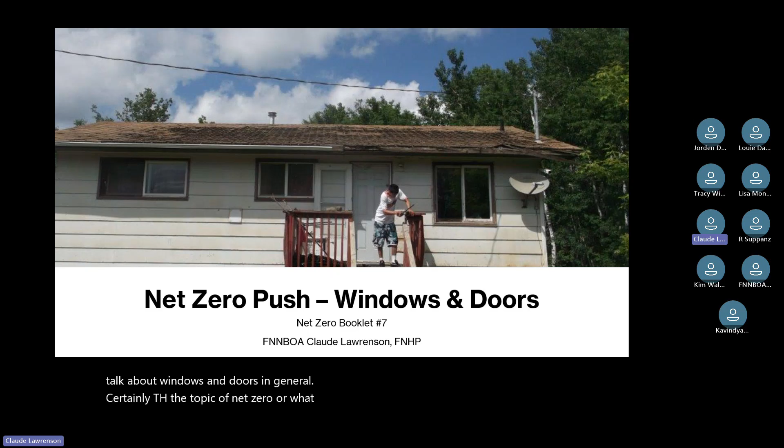But let's move beyond that. In fact, let's even push a little bit beyond net zero, and let's just talk about windows and doors in general. Certainly, the topic of net zero, or what they call the stepped approach to improving thermal energy performance in buildings, is a very important topic these days, especially related to our changing climate.

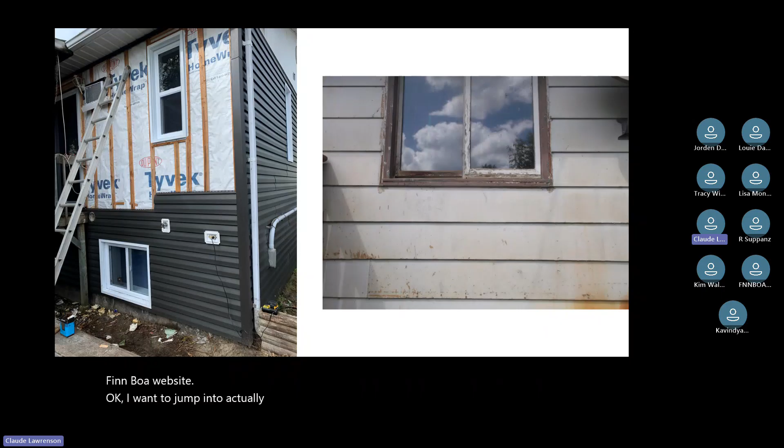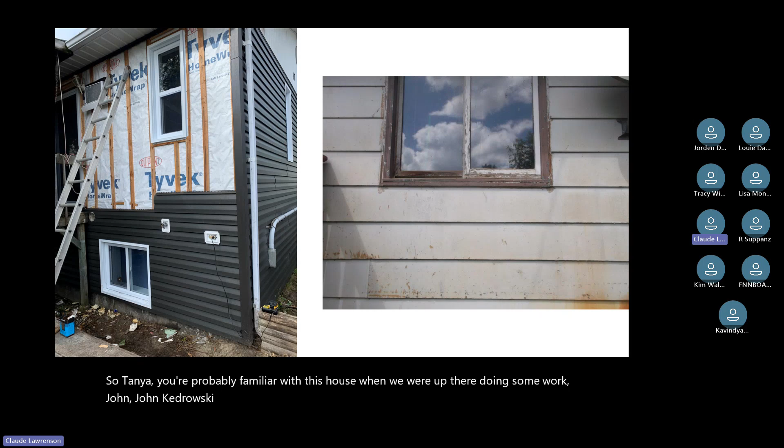Okay, let's take a look at a few things here. A couple of images. So Tanya, you're probably familiar with this house when we were up there doing some work, John Kedrowski and I. And your guys were doing some maintenance and repair and some modifications to some of the housing units. So when I take a look at this, we've got the Tyvek wrap, so the house wrap. We have some new windows and certainly some new siding going on this particular house.

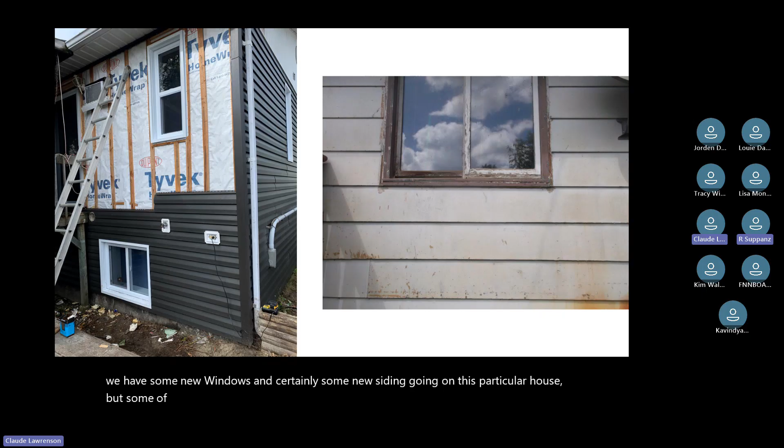But some of the things we like to take a look at from a more critical point of view is, certainly it's nice to see that Tyvek's there, but also how will these windows be protected when it comes to climatic concerns, but also environmental concerns when we take a look at any window or door. So that's what I'm really going to be focusing on.

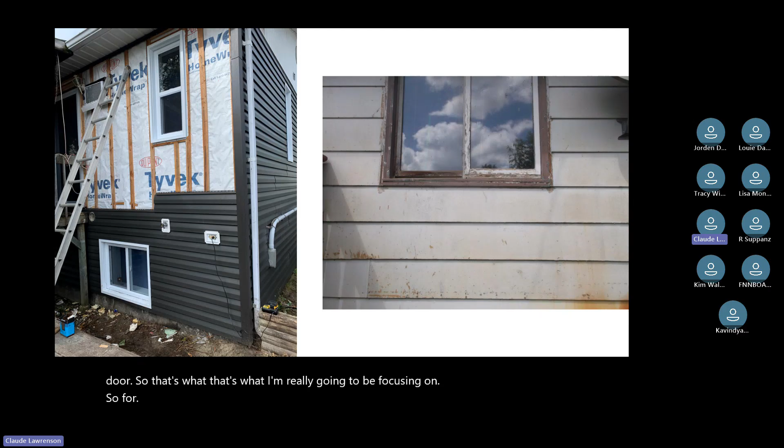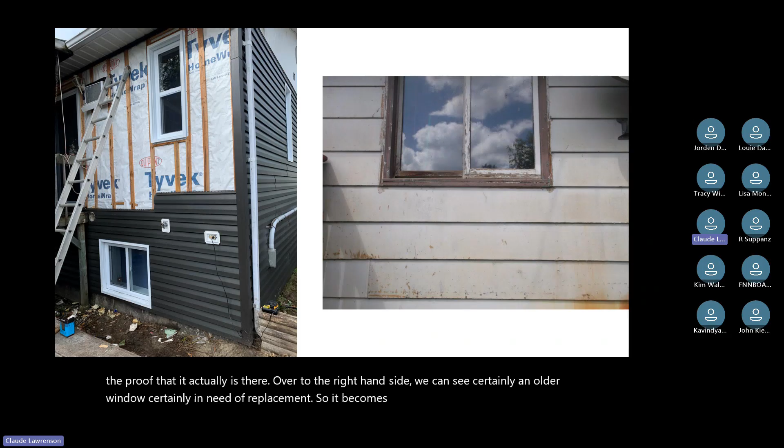So as an example, is there maybe a blue skin around those windows before they were installed? I would assume by the looks of it the Tyvek was there, because we can see the proof that it actually is there. Over to the right-hand side, we can see an older window, certainly in need of replacement. So it becomes pretty obvious when we see there's a huge transition between an older window and a newer window.

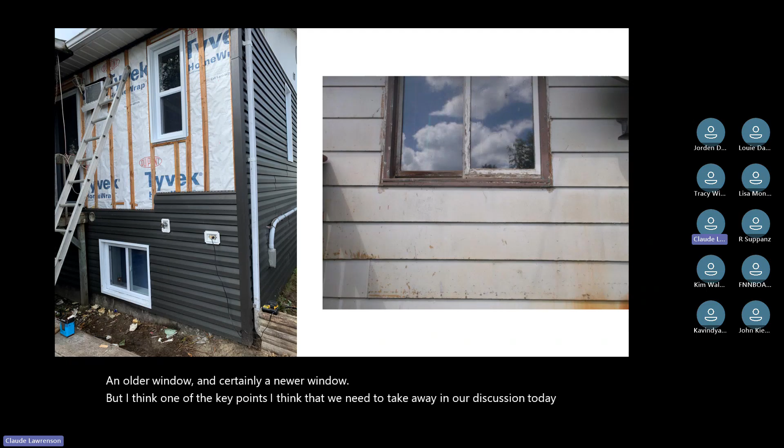But one of the key points that we need to take away in our discussion today is this: how well are those windows installed? And secondly, are they really a good window or a good door for that particular climate zone? So I'm going to touch on those topics in more detail.

Well, I mentioned the word energy holes. It's not my term, but I've come across this in a number of information pieces that I've looked at. Energy holes refers to the fact that a window or a door does not have the same thermal insulation value as, let's say, that exterior outside wall.

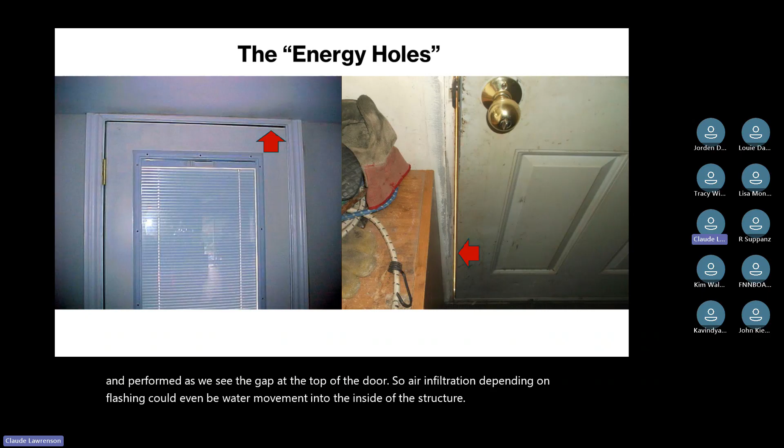So we can see in a few inspections that I've performed, we see the gap at the top of the door. So air infiltration, and depending on flashing, could even be water movement into the inside of the structure. Over to the right-hand side, again, we see that daylight gap at the edge of the door. So these are signs that we do have energy holes that exist in both of these doors.

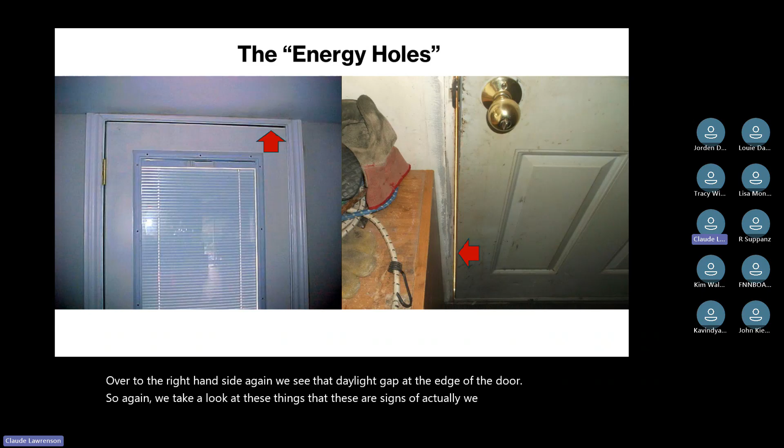Okay, sorry for the confusing looking slide here, but over to the upper left is a window. What's wrong with this window? Well, if we take a look at it, there's two little dark slots towards the top of the window. The window is actually installed upside down. Those holes should be down towards the sill because those are water drainage holes for this particular window. So again, without getting into detail of how well the window is installed, we know this particular window is installed

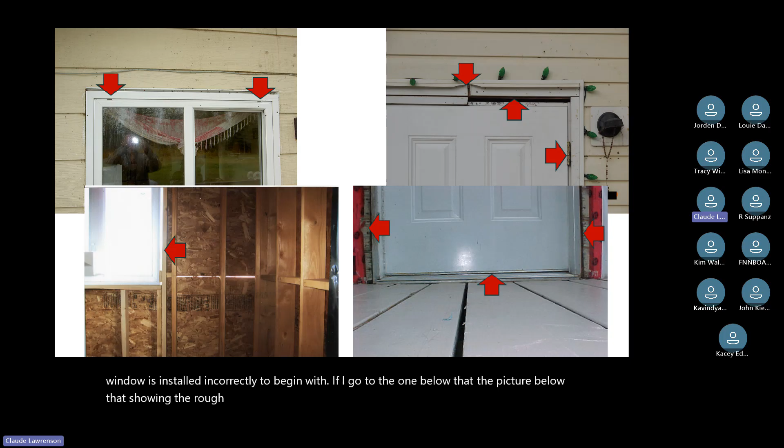incorrectly to begin with. If I go to the picture below that, showing the rough wood framing, we see the gap between that nice vinyl window and the wood framing. And of course, a lot of when we talk about the installation is how well will we seal up that particular gap? Because in a lot of cases, if we simply take something like a smoke pencil, or even something like an incense stick, and we put that around the window or door, close to that opening, is there air actually going to be pushing the smoke back towards you? In other words, there's air infiltration that's happening. So again, we talk about how well a house is sealed.

Jumping over to the upper right-hand side, we see a door that was installed improperly. And how can I tell? Well, not only is it poorly installed, why do we have hinges on the outside of the door? Shouldn't they be on the inside of the door? So again, potentially a lack of security. Certainly it shows that the installer did this incorrectly.

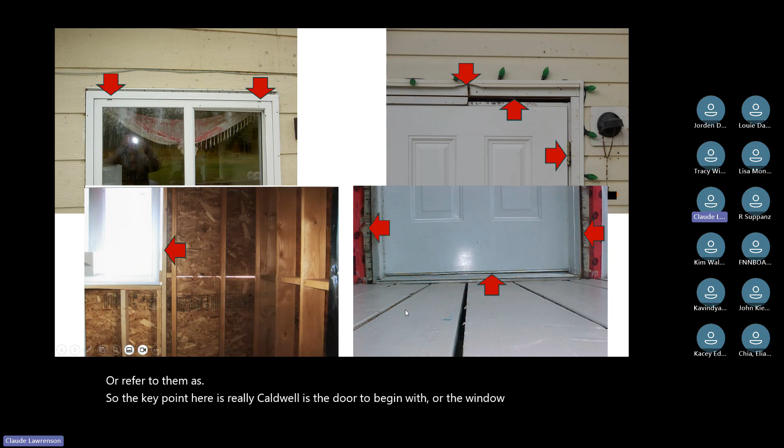Again, the lower door on the right-hand side, I'd like to look at what I call the threshold, that base of the door. And of course, this is not a finish, it's a refinish of a house. And look at the old wood siding and of course the gaps around the door. So again, those energy holes, we like to refer to them as. So the key point here is really how well is the door or the window to begin with. And certainly it's all about installation.

So let's talk about energy holes. So there's a comment by Rehau. Rehau, by the way, is a German window manufacturer. Windows are among the top energy consuming elements of a home. 25% of a home's energy is wasted as it escapes through a flexible framework, poor sealing, and through thin glass, all of which result in ineffective insulation.

So again, we're going to talk about a few points here. Windows and doors must meet today's standards based on building code. It starts with the selection and proper installation of the actual unit itself. But just to give you an idea, there's over 320 manufacturers of Energy Star compliant windows and doors in Canada. And when we take a look at them, we should be looking at the performance requirements for your particular climate zone. Certainly a triple pane window is a magnificent window if it's affordable, and with low-E film and argon insulating and insulated spacers, they're really an excellent choice. But is it really necessary for every location?

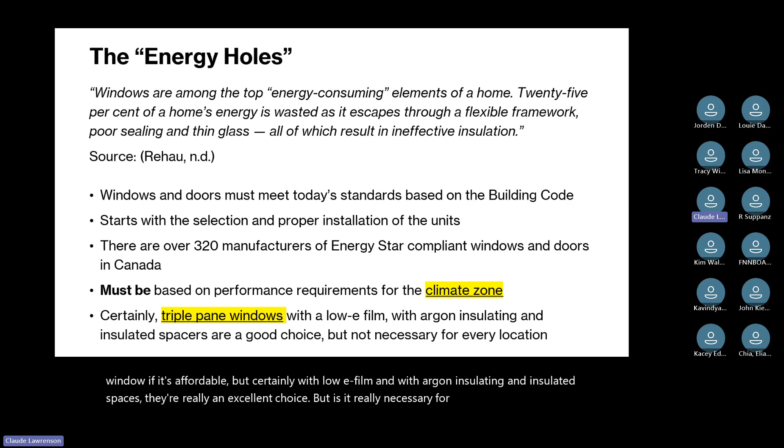So let's get into a little more detail. I mentioned, is it adapted to your climate? Windows must be designed and adapted to your climate. Canada's divided actually into 6 climate zones, each with specific requirements for windows and doors. Products must be chosen to match your local climate for optimal energy efficiency and comfort.

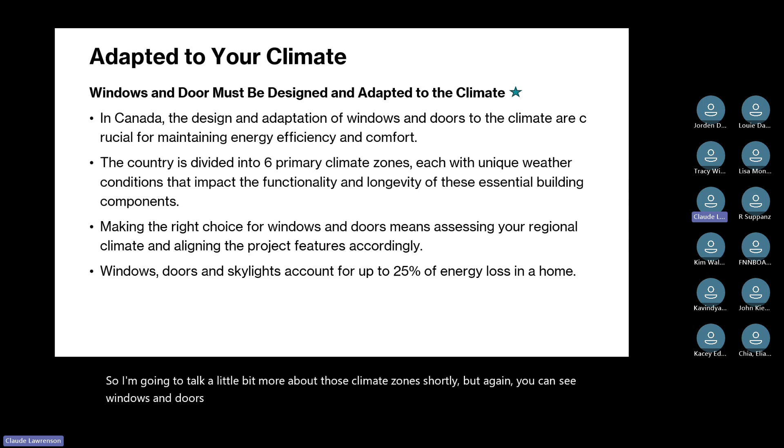So one example, when we take a look at the insulation in a house, the amount of insulation required for, let's say, a wall or a roof or a foundation system, we talk about R values. So what's the R value of the insulation? Is it R12, R20, R40? So we talk about insulation in terms of this R value. Homes and buildings will require, when we talk about net zero in the future of building codes, higher thermal energy performance requirements. I'm going to talk a little bit more about those climate zones shortly, but again, you can see windows and doors and skylights, where they apply, account for up to 25% of the energy loss in a home.

So just popping in to visit us is what I refer to as a climate zone map. When we take a look at this map very briefly, we can see they call them zone 4 through zone 8. And these are based on what they call HDDs, heating degree days. So for example, if we take a look at Victoria over to the far left of this illustration, that's zone 4, based on 3,000 heating degree days. But if I go up to the extreme north, let's call it Yellowknife, it's zone 8 at 7,000 heating degree days.

And when we talk about heating degree days, we're talking about the amount of extra days of heat that we have to consider when we talk about thermal insulation and insulation values. So again, putting it simply, the further north we go, the colder it gets, the more insulation is required. When we talk about windows and doors in particular, we really need to have windows and doors that are best suited for the north.

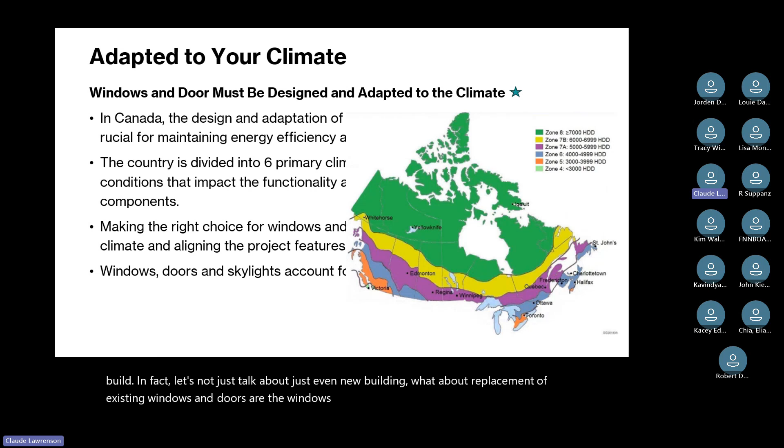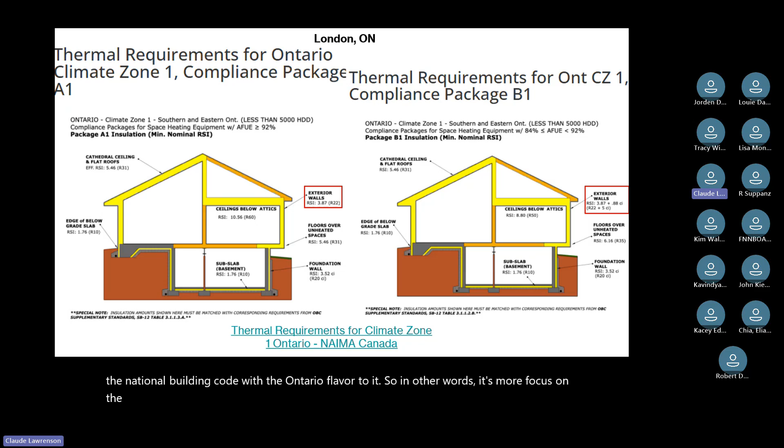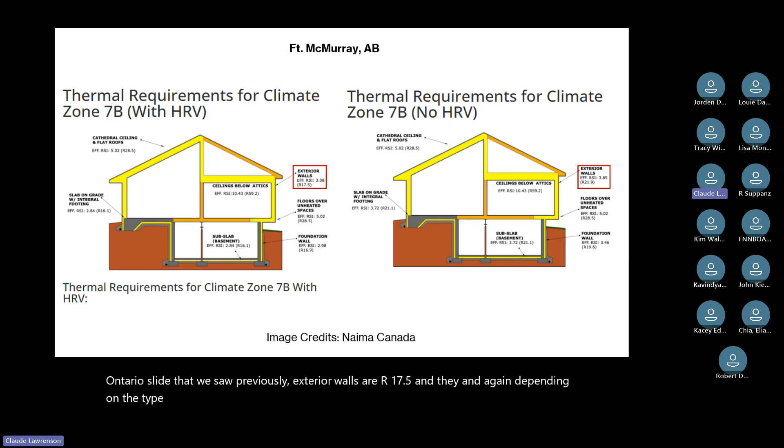Over to Fort McMurray, we take a look at climate zone 7B, further north than that southern Ontario slide that we saw previously. Exterior walls are R17.5. And again, depending on the type of heating system, is it with an HRV, heat recovery ventilation system, or without? So even the mechanical or heating systems within the house, along with the ventilation systems, can have an impact on the requirements when it comes to thermal performance of any particular building, in this case, a house.

So let's back up a little bit and take a look at an older home versus a newer home. If I jump over to the right-hand side, a typical National Building Code house in the year 1995 called for R12 in the walls as far as thermal insulation values, the attic R31, the floor R28, the foundation R10, the windows R2, and the doors R2.

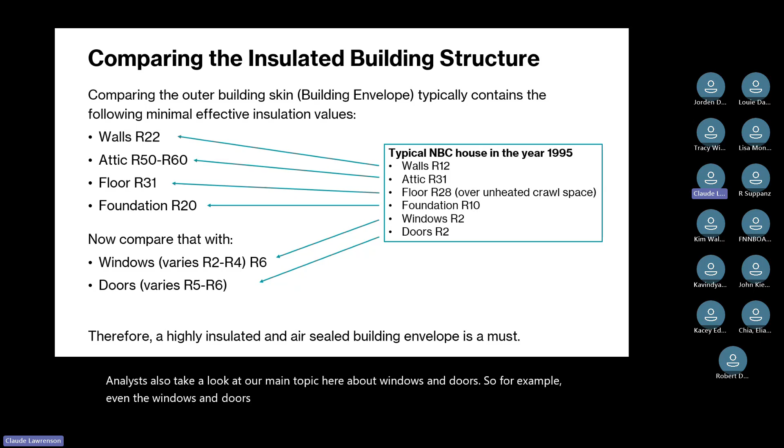Well, current codes call for R22 in the walls. You can see a substantial increase in the walls. Look at the attic, again, a substantial increase, R50 to R60, floors R31, and the foundation R20. And let's also take a look at our main topic here, windows and doors. Even the windows and doors have basically doubled, and in some cases almost tripled, in thermal performance requirements. Therefore, a highly insulated and air-sealed building envelope is certainly a must.

So when we take a look at these, we can see there's been a substantial change. So even a house that's 15 years old, or let's say even 20 years old, but even as recent as 15 years, there's been a significant change in the requirements for thermal performance. So we're going to boil that back down to beyond just the building itself, certainly back to windows and doors, which is again our main topic here.

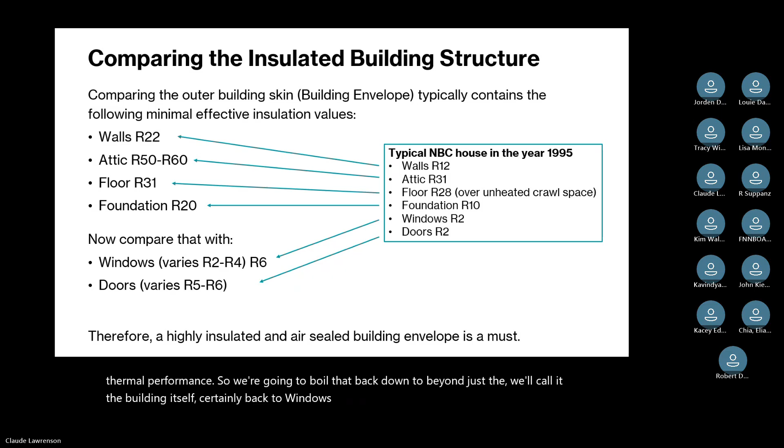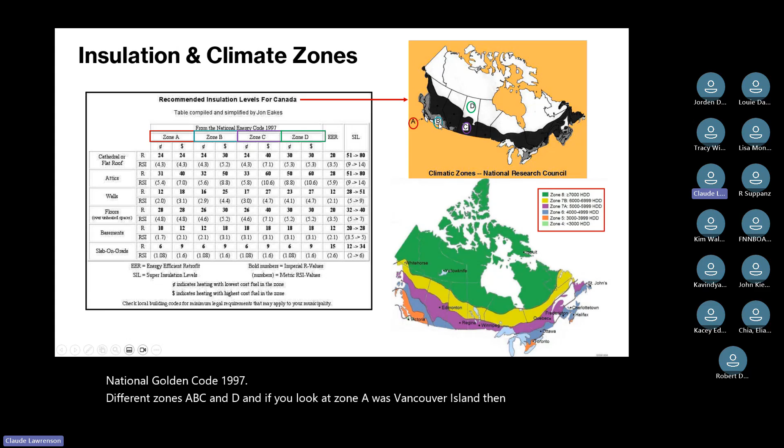So again, just another look at insulation and climate zones. For example, this was compiled by Jon Eakes, National Energy Code 1997, different zones, A, B, C, and D. Zone A was Vancouver Island. Zone B, we'll call it lower British Columbia. C, jumping over to Saskatchewan. And then D, looking at northern Saskatchewan.

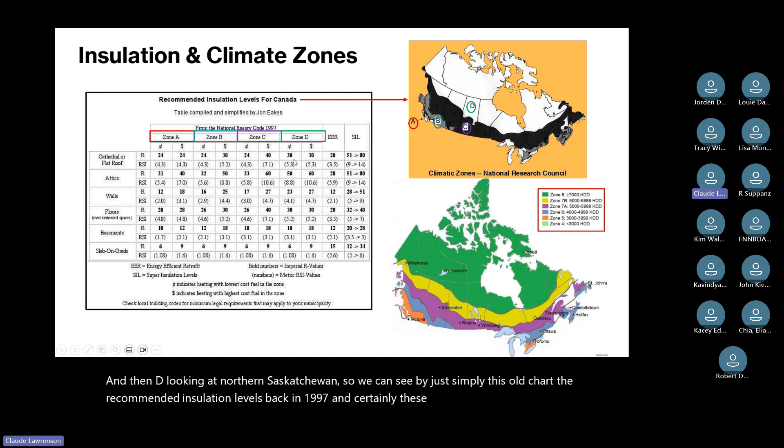So we can see by this old chart the recommended insulation levels back in 1997. And certainly most houses today are inadequate when it comes to the thermal performance ratings that are basically required today. Again, we see our climatic zone maps. For the most part, that green area, the northern extreme, is where the highest insulation values are required.

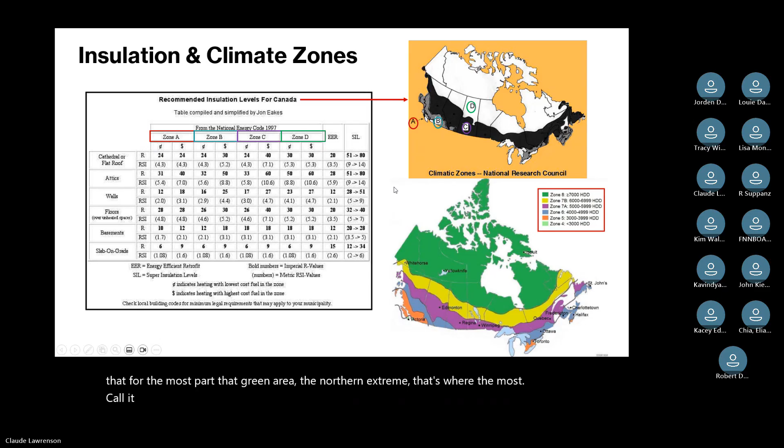So what are some of the key takeaways here? Well, if you're from the old school, as opposed to talking about U values, we can see that as the R values increase, the thermal performance has also increased. Remember, we're talking about R12 or R20, or in some cases much more insulation in a wall.

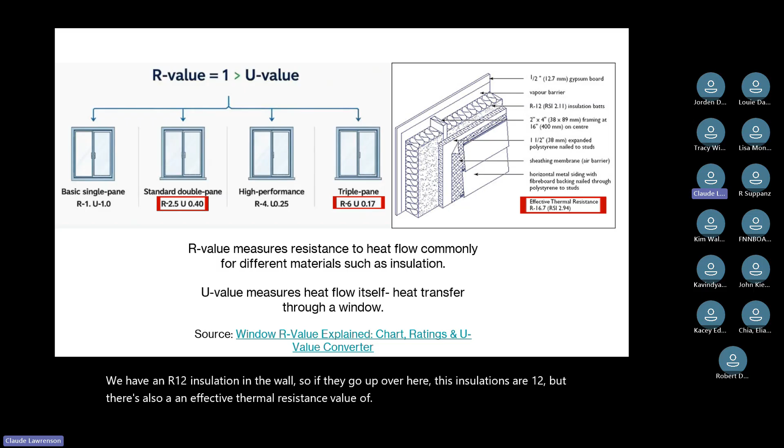Okay, so when we take a look at the illustration on the right-hand side, this isometric view of a wall section, we can see that we have R12 insulation in the wall. This insulation's R12, but there's also an effective thermal resistance value of R16.7. This is built up because of the various layers and insulation values for this particular wall assembly.

So we take a look at gypsum board, the vapor barrier, the insulation. It's on a 2x4 wall framing system. It has expanded polystyrene, so rigid board insulation nailed to the stud. It has a sheathing membrane or an air barrier, and of course siding. We won't get into all the details of effective versus general insulation values of this wall for the R values.

But R values measure resistance to heat flow, commonly for different materials such as insulation. U values are used to measure heat flow itself, heat transfer through a window or through a particular opening such as a door.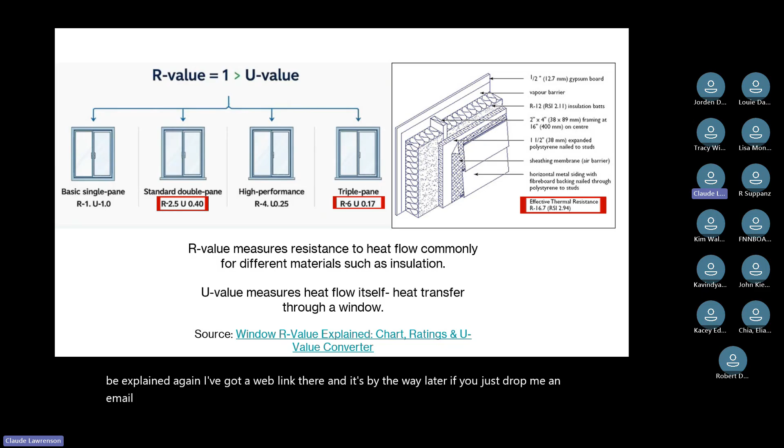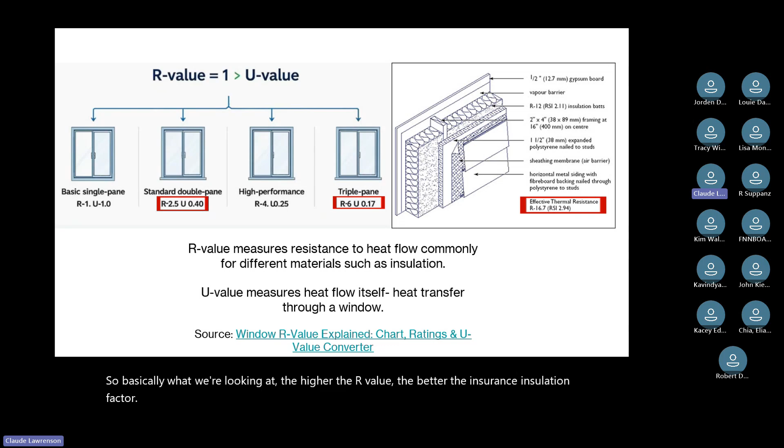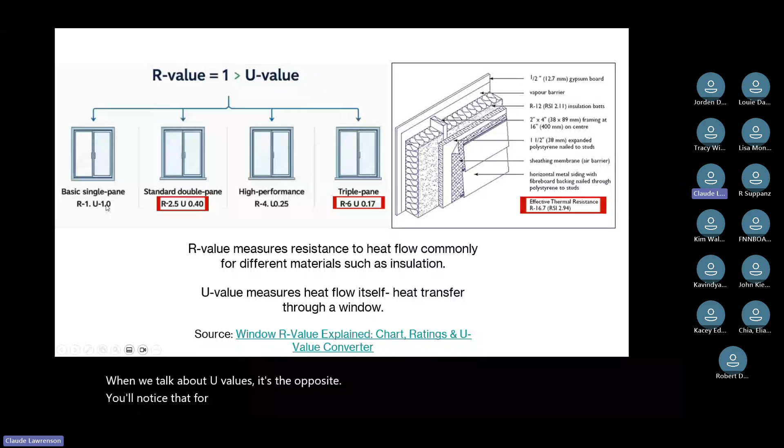So basically, the higher the R value, the better the insulation factor. The lower the R value means more heat loss. When we talk about U values, it's the opposite. You'll notice the U value started at 1.0 for the single pane, but in the middle they're dropping: 0.40, 0.25, and the triple pane, 0.17. So one of the things we need to be aware of is what those factors are and how do I get better thermal performance?

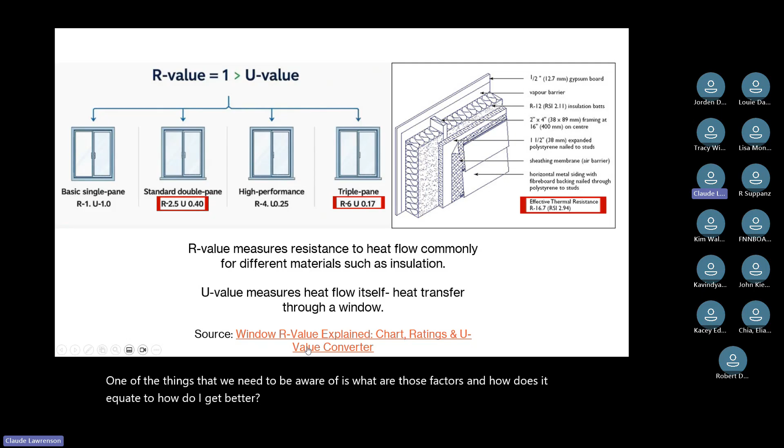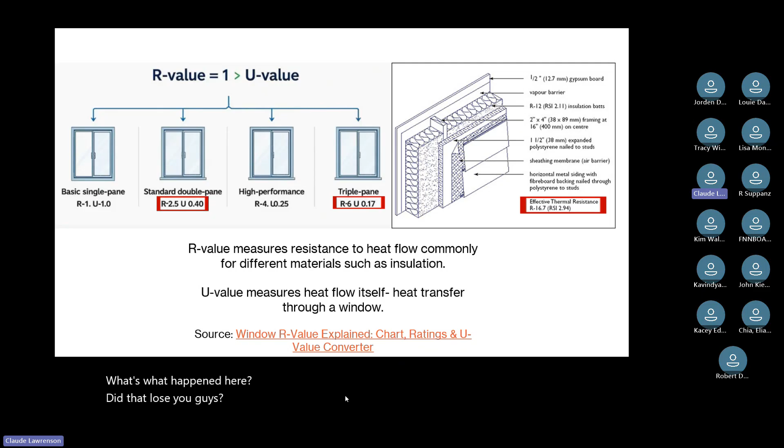Oops. Didn't want to go there. Oops, what happened here? Did I lose you guys? There we go. You're still here, Claude, but sometimes it muffles out. I'm not sure if it's me or... There's nothing here, I'm looking. It might be if you're close to the mic. I'm reasonably close to the mic. Okay, well, we'll keep going.

Okay, let me just go back a couple slides. I just want to make sure I was going in the right direction. Okay, perfect. So, selection of new builds and retrofits. When we talk about windows or doors, we must consider a number of factors, as I've been talking about so far. The National Energy Code of Canada for Buildings 2020 and the National Building Code of Canada 2020 set the requirements for windows and doors, and construction of buildings in general.

But when we start talking about energy codes, we also need to think about how the requirements are changing as we talk about net zero and the changing climate. These codes provide the current standards and recommendations for energy efficiency in building components. They specify the minimum performance standards for air tightness and durability.

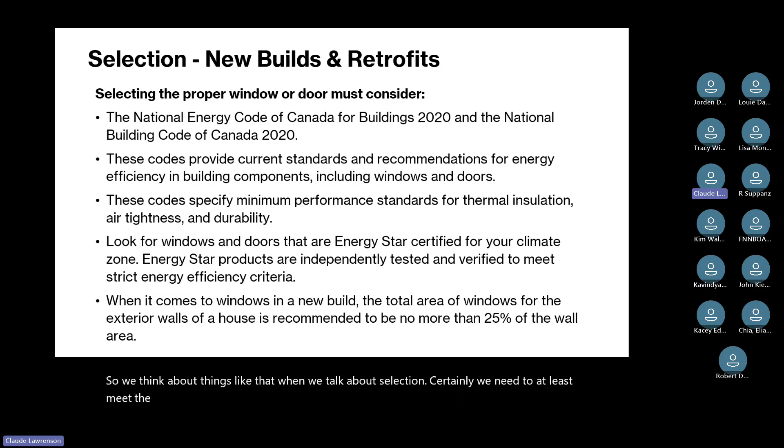So let's take a quick glance at a few of the issues mentioned in the building code. On this slide, 2020 NBC windows, doors and skylights, is a screen capture of Section 9.7 of the National Building Code. Subsection 9.7.3 talks about the performance of windows, doors, and skylights. Article 9.7.3.1 covers general performance expectations, and we get down to what they call the sentence level.

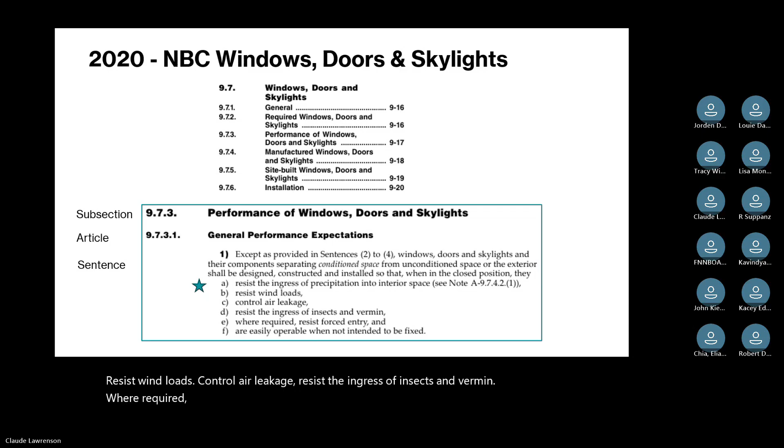It says, except as provided in sentences 2 to 4, windows, doors, and skylights and their components separating conditioned space from unconditioned spaces or the exterior shall be designed, constructed, and installed so that when in the closed position, they resist the ingress of precipitation, resist wind loads, control air leakage, resist the ingress of insects and vermin, where required resist forced entry, and are easily operable when not intended to be fixed. Those are testing performance requirements any window manufacturer doing a tested assembly must meet.

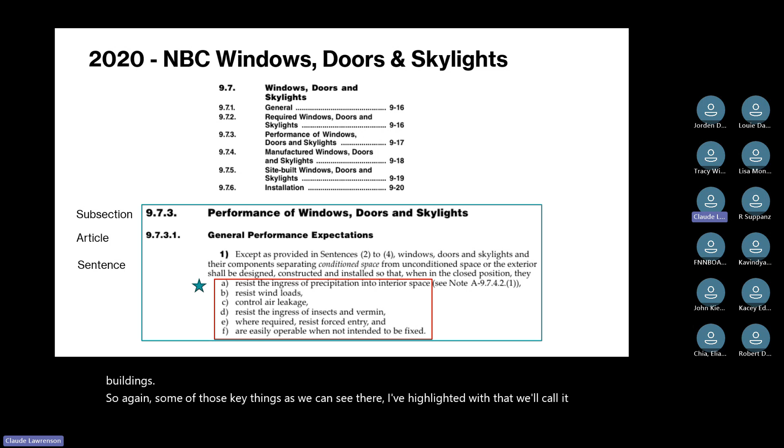That's also what we anticipate should be installed on any particular house or building. Part 9 of the building code is primarily for residential or smaller buildings, whereas Part 3 gets into larger buildings. I've highlighted some key features with the burgundy rectangular box, and of course there are notes. I'm not here to teach you all about building code, but these are the minimum requirements for windows and doors.

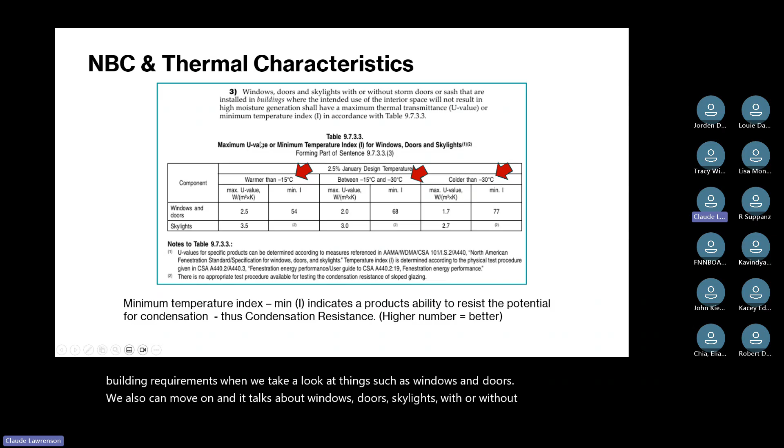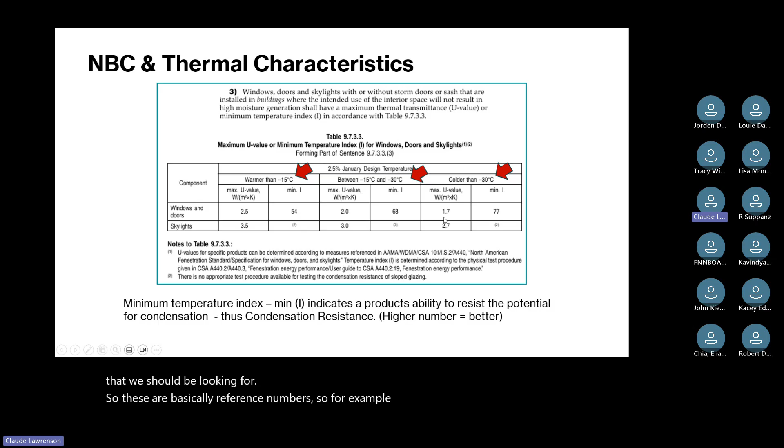It also covers windows, doors, and skylights with or without storm doors. We're looking for certain maximum U-values and minimum temperature index. The design winter temperatures are warmer than -15°C, between -15°C and -30°C, and colder than -30°C. Windows and doors have performance criteria for each, for example 2.5 versus 1.7. In a warmer climate, we don't need as high a thermal performance as the colder region's 1.7.

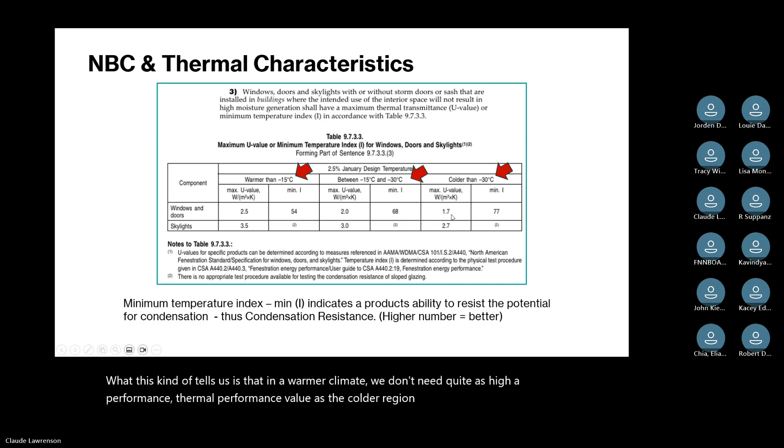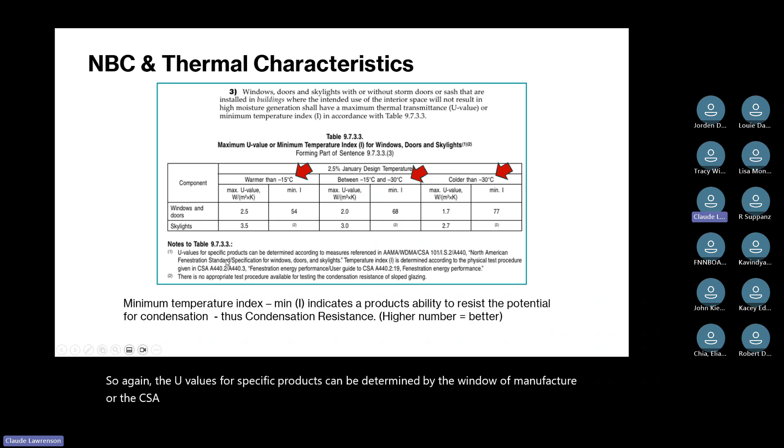The U-values for specific products can be determined by the window manufacturer or the CSA standards, the North American Fenestration Standard specifications for windows, doors, and skylights.

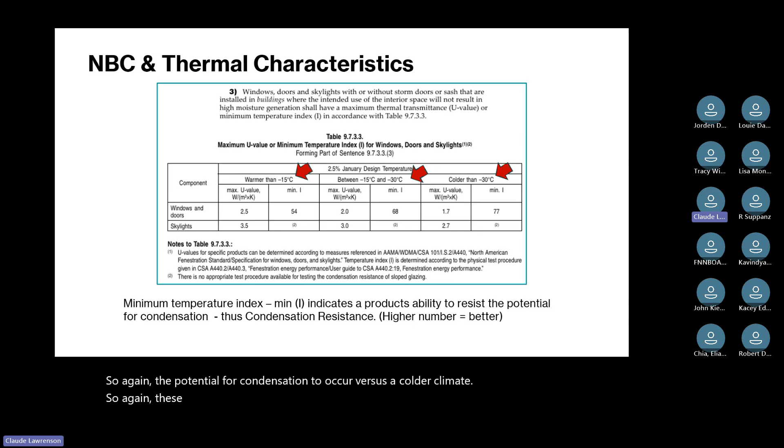So again, these things tell us about the minimum temperature index. The minimum index indicates the product's ability to resist potential for condensation. So again, potential for condensation to occur versus a colder climate. These are all tested assemblies, and these are the performance requirements that should be met when we talk about the selection of windows and doors.

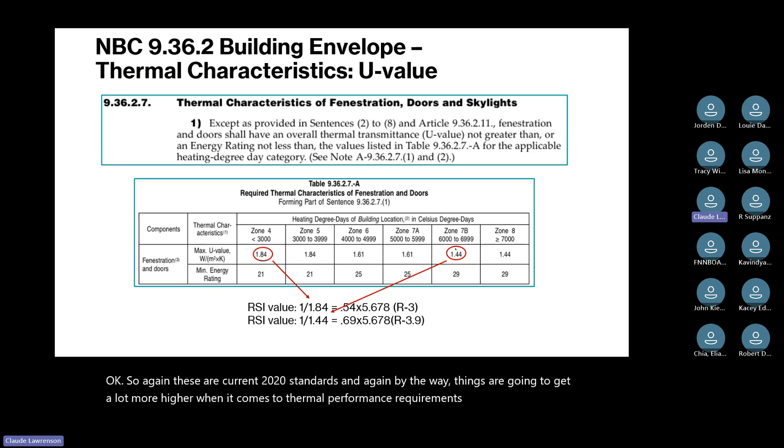So again, these are current 2020 standards. And by the way, things are going to get a lot higher when it comes to thermal performance requirements in the upcoming future. For example, the 2025 building code, the 2030 building code, and so on, because the further along we get, the more thermally efficient our buildings must become.

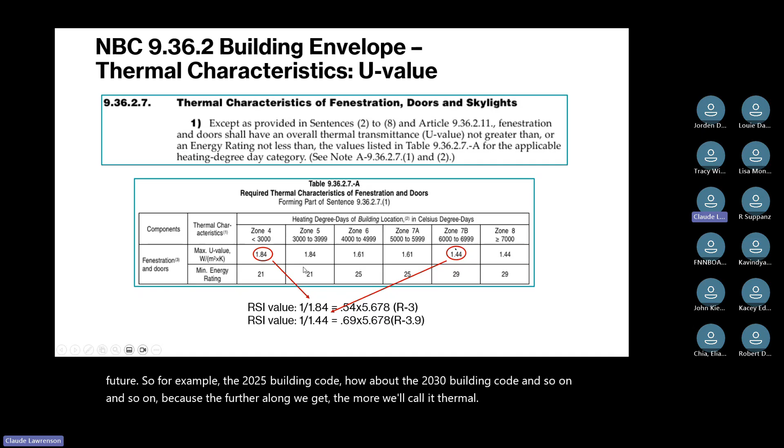Air leakage. Back to those windows and doors we saw earlier in the slides, right from the very beginning, we saw those large gaps around windows. When they do the rough framing, there's usually about a ½ inch of clearance around the framing to allow for the fitment of windows and doors. But the question is, how well are they sealed when we talk about the gap or the opening around the unit that's going to be installed?

When we take a look at the building code, they talk about section 9.36, which is all about energy efficiency. In this part of the building code, air tightness, we're talking about how well we're going to be required to seal up those openings. The building code tells us that with windows and doors, not only do we have to think about what we're going to select, but how well we're going to install them when we get on site.

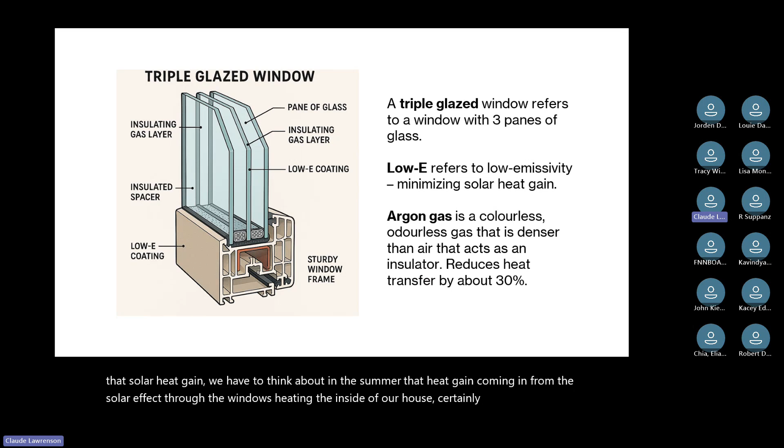Certainly in my area, if I don't have a low E coating on my windows, I'm getting a lot of heat gain inside the house. And in my case, I also have to live in the summer with air conditioning running to get rid of some of that heat building up in the house. That heat gain can be a good thing in a northern climate when we're trying to offset the cold days, but not something we always need to forgo, because low E refers to minimizing that solar heat gain.

Argon gas, being a colorless gas, is denser than air and acts as an insulator. Basically, the spaces between the panes of glass are filled with argon gas, which acts as an insulator between the glass. Along with the low E coating is a sturdy window frame. There are all different types of products out there, be it wood, vinyl, fiberglass, metal, and so on, when it comes to the frame itself. Just trying to give us some idea of the components.

These gray areas that look like they have little bubbles are basically foam gaskets in most cases that are really thermal breaks, so that when the outside of the glass gets cold, it doesn't necessarily transfer the cold to the next pane, or the heat from the inside of the house going in the opposite direction.

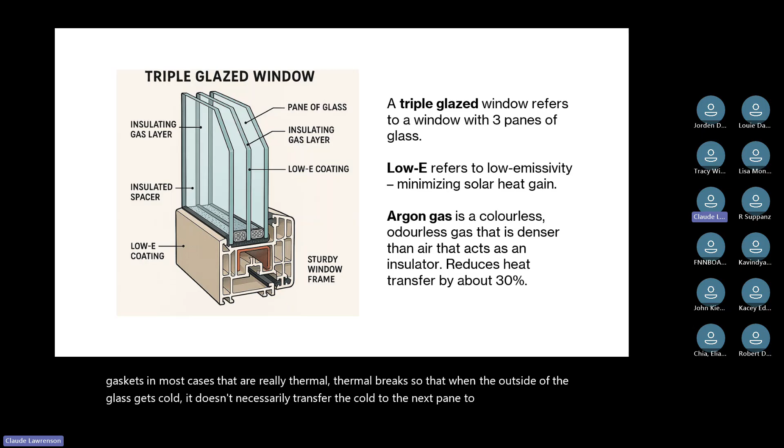So let's compare a triple to a double glaze. So we'll keep it pretty simple. Well, if we take the bottom line, the cost difference can range upwards of 30% or more for a triple glaze window. But here are some of the summary tables, the features. The insulation is excellent on a triple glaze, energy efficiency superior, condensation control is excellent, noise reduction excellent, and the cost certainly is higher.

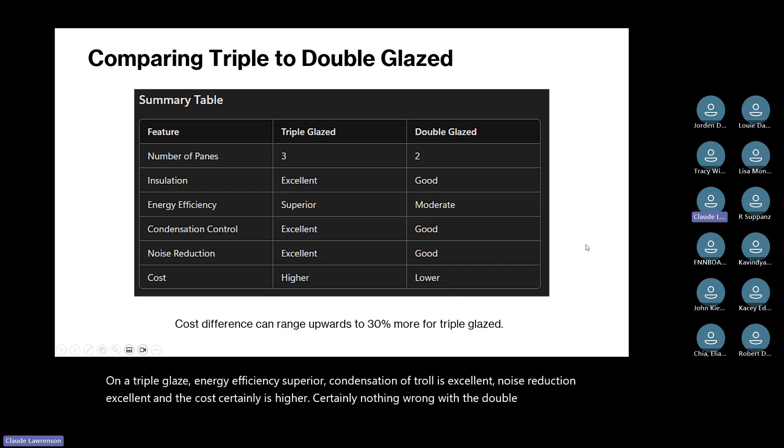Certainly nothing wrong with a double glaze window. All my windows are double glaze. I don't necessarily need triple glaze, although if I was going to replace all the windows on the north side of the house, I probably would consider going triple glaze for those windows, because that's always going to be the coldest side when it comes to, we'll call it heat loss, lack of sunshine on that particular north side of the house.

Next, let's talk a little bit about Energy Star rating. So when we take a look at Energy Star rating, it's an internationally recognized certification program that basically identifies products meeting their strict energy efficiency standards. So one of the first things we should be looking for is certainly that Energy Star label on a window. Again, it identifies here the spacer, the gas, the low E coating, the triple glazing. This means a product's been independently tested and certified, and it meets a particular standard.

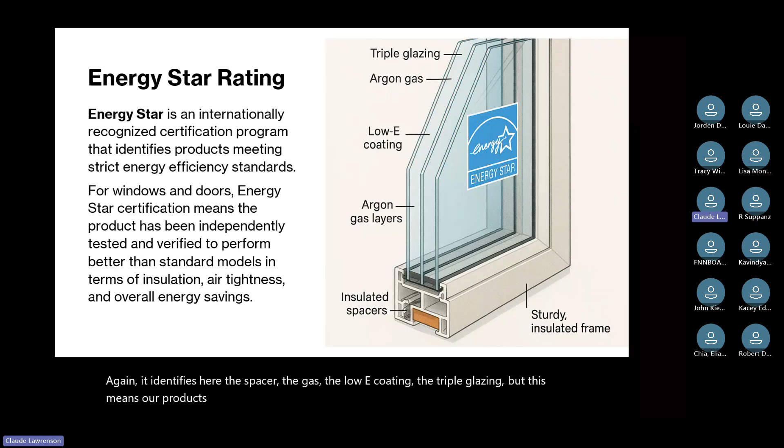But what we really need to do next is go beyond just thinking about the Energy Star rating, and take a look at the label on windows. So again, when we were doing some training out in Winnipeg, we were visiting a local lumber yard, and we were looking at a number of different windows and the Energy Star labels. So first off, what are some of the key things that we should be looking for when we take a look at that Energy Star label?

Well, the U value, that's a building code issue, smaller number, lower heat loss. So 1.10 for this particular window. The energy rating is 36. The larger number, the higher the energy efficiency rating. Another part, we talked about air leakage. Well, the air leakage number, less infiltration. We can see it talks about the air infiltration.

Who makes the window? And of course, this one is CSA standard certified, tested for meeting their assurance testing standards. Over on the other side, we have solar heat gain, visible transmittance of light that passes through the window, and the condensation resistance. So again, we take a look at this particular window as being probably pretty good for a particular area, meeting a particular climate zone. But we'll notice that at the lower part here, in 2025, this particular U factor here is 1.05.

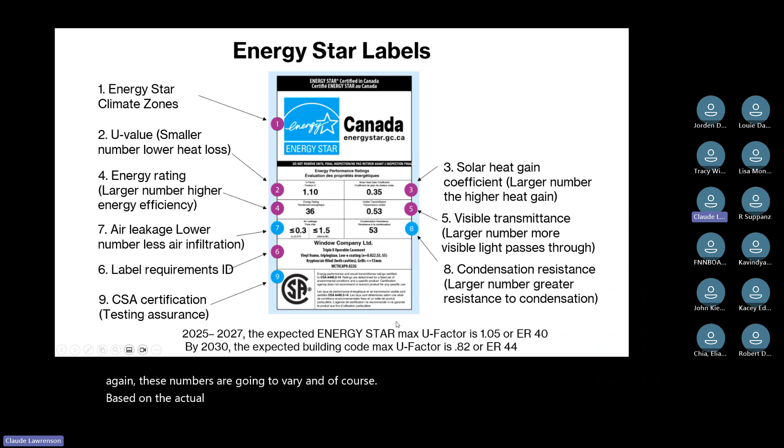Let's jump into next, moving beyond the label. What about the installation? Well, this illustration gives us a window flashing diagram. Install flashing from the bottom up. So in this particular case, we can see step one, the sill flashing turns up.

So for example, if we imagine this gray area here as being our Tyvek, and we start looking at some of the wraps to flash this window better, tighter, to reduce not just air, but also water and moisture coming through this window, we want to look at tightening up and sealing these openings better. We saw earlier those great big gaps, which we don't always know how well they've been filled, how well they've been insulated, or even if they were insulated or not.

There could be a number of concerns, certainly, when we know that there's air leakage around any window or door. So how do we tighten it up? And this is what this installation detail is all about. Well, we can see there's jamb flashings to the window units installed. There's a head flashing, and certainly there's a flashing termination.

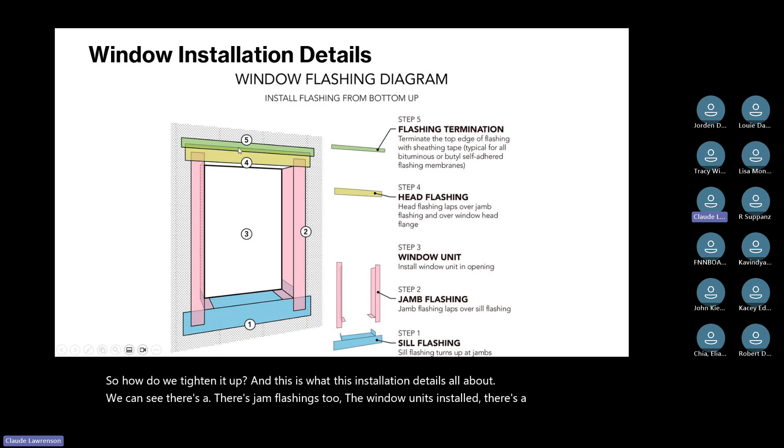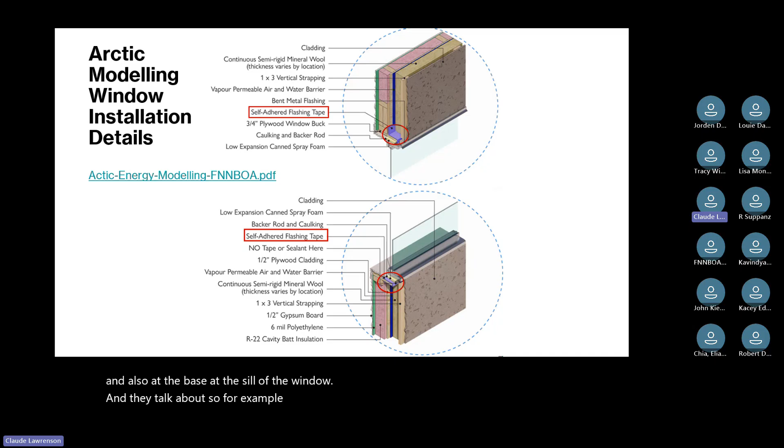So for example, if we take a look at where I've bolded in red the self-adhered flashing tape, this purplish color. So this is up at what we'll call the head or the top of the window, and also at the base, at the sill of the window. And they talk about these flashings, this tape. What are they talking about when they talk about these tapes and flashing?

Well, what they're really talking about is two products that are pretty common in the market today: Tyvek, which is a house wrap, versus Blueskin. What's the difference between the two? They're both great products. So when it comes to windows and doors, Tyvek and Blueskin depends on a specific project and local conditions. So I've put on this slide some of the key features.

So Tyvek, known for its breathable nature, allows moisture vapor to escape while blocking air and water infiltration. It's favored for its versatility and wide availability, making it popular for many homeowners. Blueskin, a little more expensive, is a thicker flashing membrane that provides a continuous air barrier, which helps maintain indoor comfort.

It's designed for extreme weather conditions. Keyword here, extreme weather conditions, offering superior moisture management. Good product, great product. Certainly there's a cost difference. Blueskin is primarily made from a self-adhering membrane. Both house wraps serve a critical role in energy efficiency.

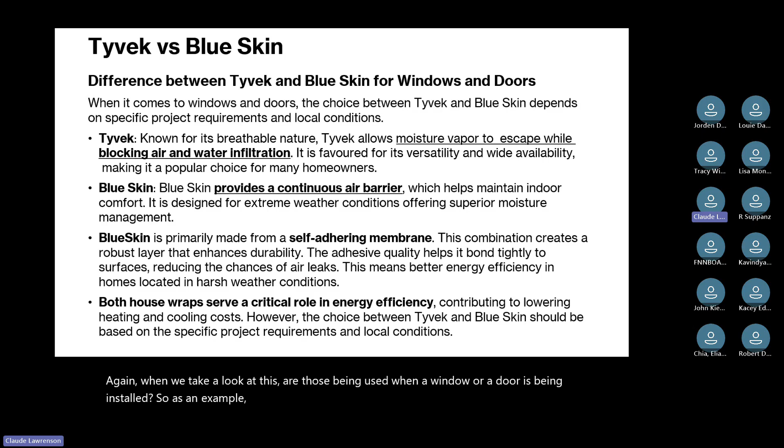So when we take a look at this, are those being used when a window or door is being installed? As an example, I had two of my back windows replaced. And the installers used Tyvek, and over top of that, Blueskin. No problems. Great products.

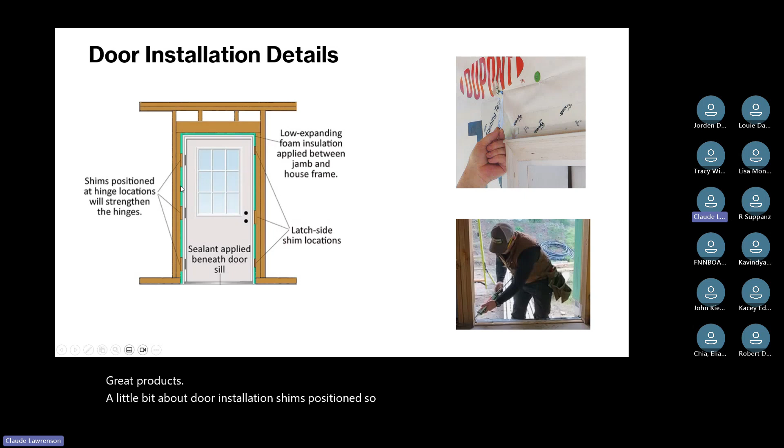A little bit about door installation, shims positioned. We can see this gap, so to speak, this greenish color around the door frame. The rough framing in brownish color is representing the wood framing around the door opening. We had some shims or blocking in place to help strengthen around where the hinges are and where the latch is. But we've got this whole green space that we have to fill. And how that is being filled is an important detail.

So low expanding foam insulation is applied between the jamb and the house frame to seal up that gap, that opening. We can see here a couple of images where we can see the Tyvek, the flashing going in around these windows, and of course caulking and sealing this particular door sill. So a sealant applied beneath the door sill, because sometimes the installers just don't do that. It's just fastened tight to the floor.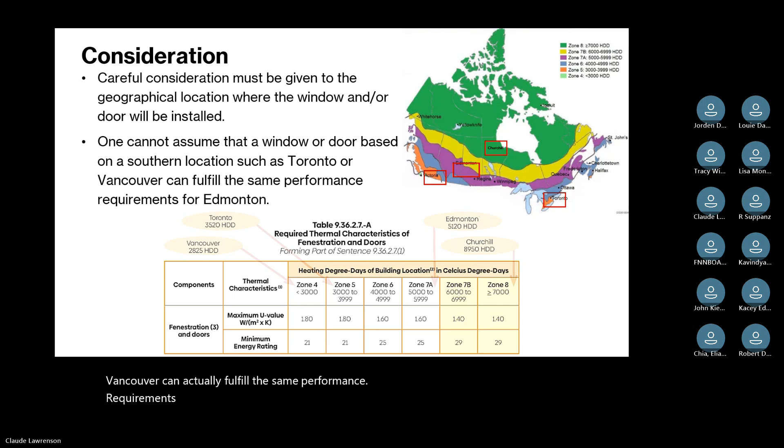Moving on, considerations. Again, we see our climate map. Careful consideration must be given to your geographical location where the window or door will be installed. One cannot assume that a window or door based on a southern location such as Toronto or Vancouver can fulfill the same performance requirements, say, for Edmonton. We've done a comparison in our net zero study of the maximum U values, the energy ratings, and so on, based on building code.

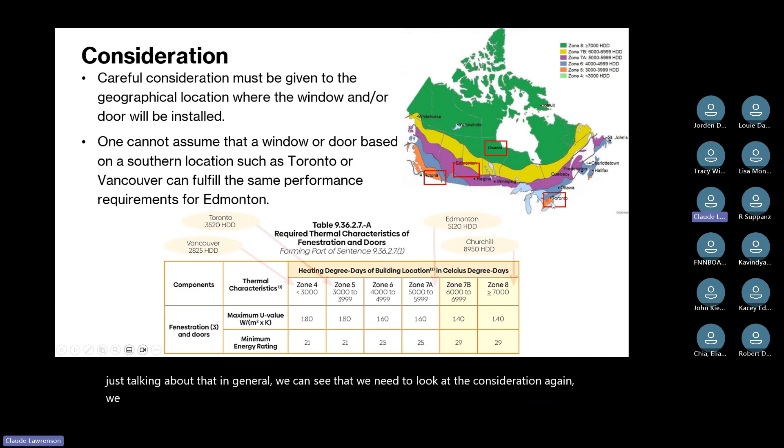So in general, you can see that we need to look at the consideration. We can't take that window from down here. Well, you actually can take it, move it up north and install it. But will it serve the thermal performance value, or are you always going to have a lot of heat loss through your windows and energy just being wasted?

I think I might have jumped ahead here. Yes, I did. Okay.

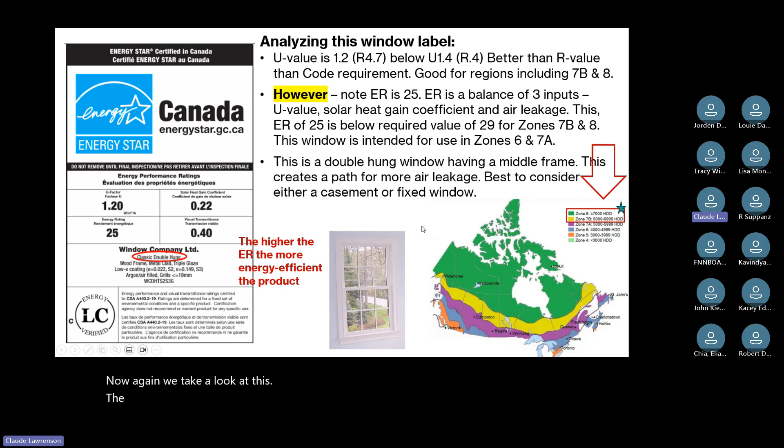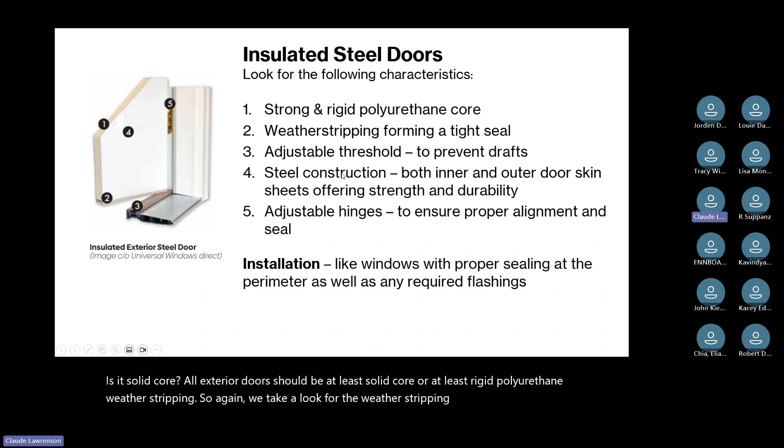Adjustable threshold, this threshold here. Steel construction, both inner and outer door skins, so the metal. Adjustable hinges, again, to ensure proper alignment and seal. Like windows, with proper sealing at the perimeter, as well as any required flashings.

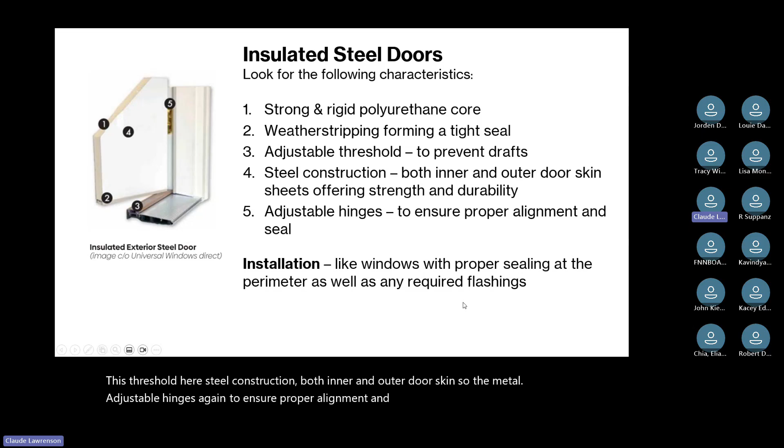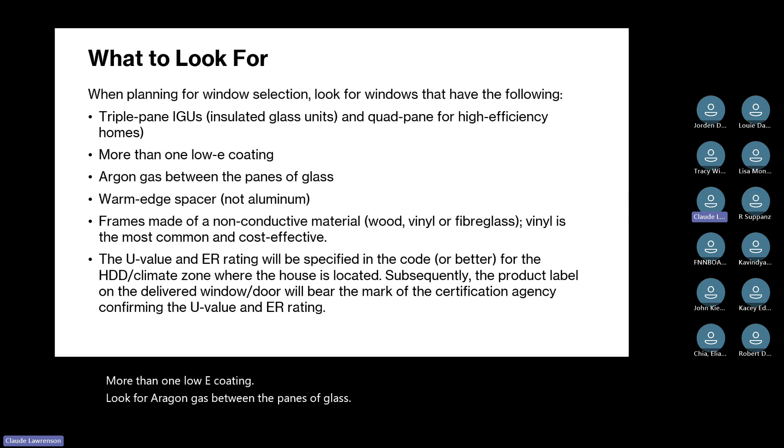So what do we need to look for when planning for window selections? Well, do we need to have triple pane insulated glass units, and quad pane for high efficiency homes? More than one low E coating. Look for argon gas between the panes of glass. Warm edge spacer. So warm edge spacers are typically anything but metal, so not aluminum.

Frames made of non-conductive material, so for example, wood, vinyl, or fiberglass. Vinyl is the most common and cost-effective. Fiberglass is a great window, but a little more expensive than vinyl. U value and ER rating will be specified in the code or better for the heating degree days for your particular climate zone.

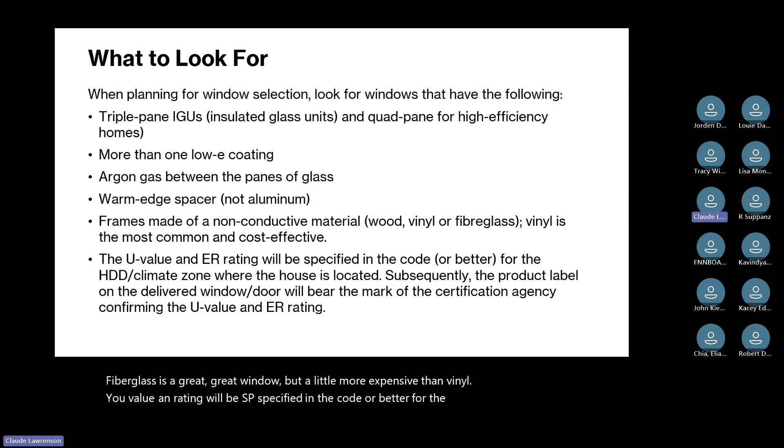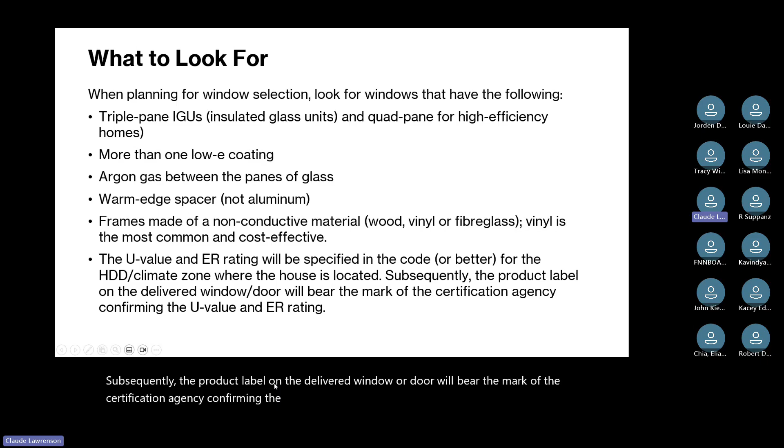Subsequently, the product label on the delivered window or door will bear the mark of the certification agency, confirming the U values and the energy rating. So before closing, a few other just general considerations. My backgrounds are architecture, design, and construction.

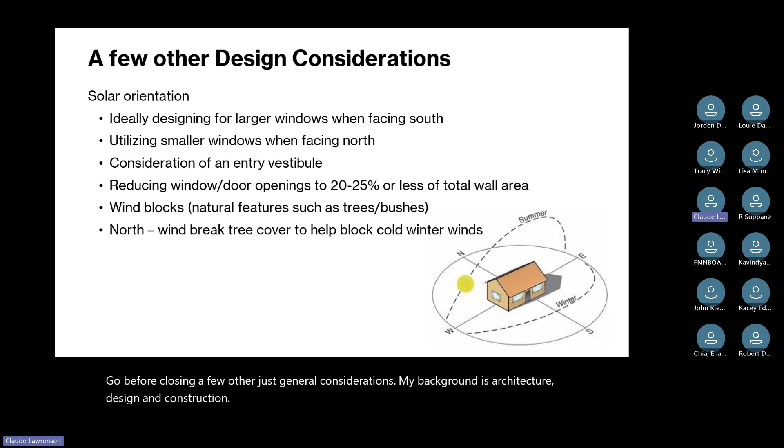When I take a look at a window or door, we talk about thinking about solar orientation. Ideally, designing larger windows that face south, utilizing smaller windows when they face north. Consideration of an entry vestibule, again, to cut down on heat loss. It's almost like a double lock door system, where basically you have that little push out at the main entrance door to cut down on heat loss.

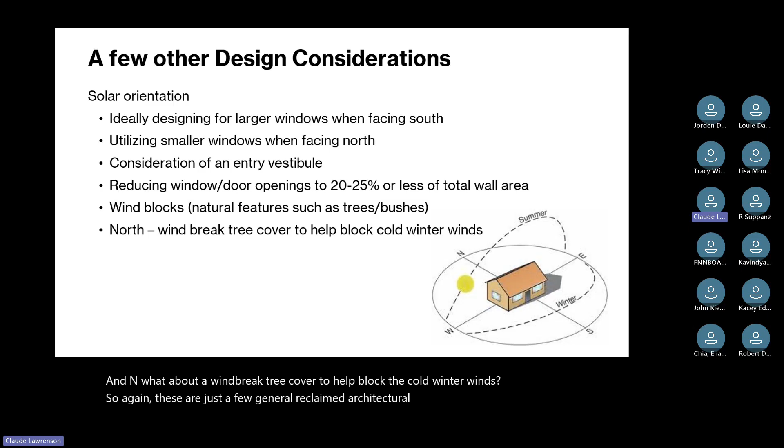Considering wind blocks, natural features such as trees and bushes. And north, what about a windbreak tree cover to help block the cold winter winds? So again, these are just a few general architectural or construction design considerations when we talk about windows and doors. Certainly, this would not just have an impact on windows and doors, but also the thermal efficiency of the building structure itself.

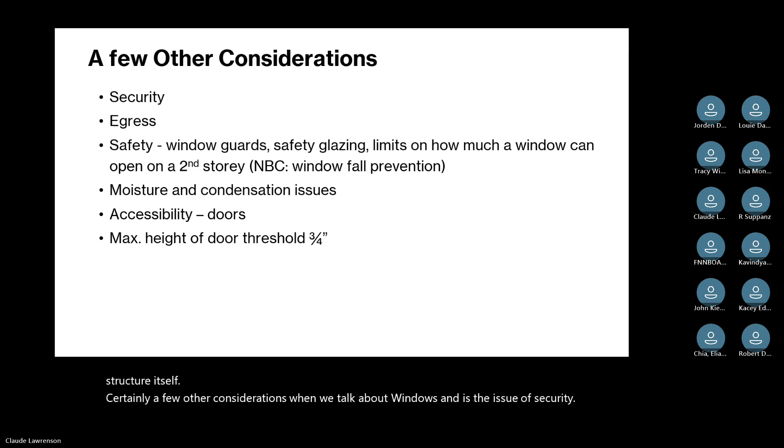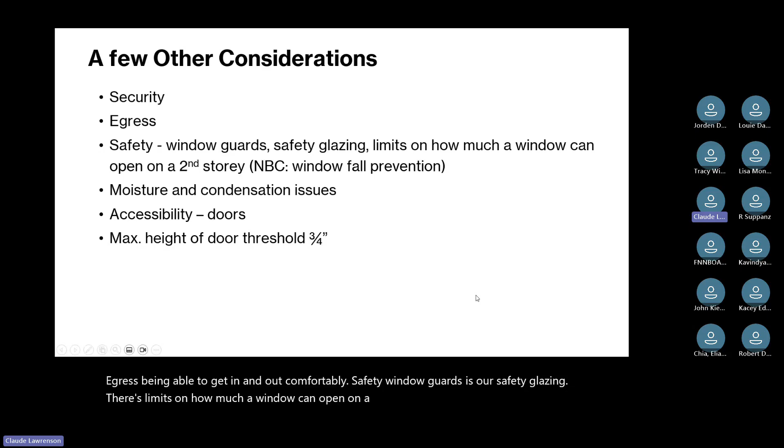Certainly, a few other considerations when we talk about windows and doors is the issue of security. Egress, being able to get in and out comfortably. Safety, window guards, is there safety glazing? There's limits on how much a window can open on a second story. So for example, in the building code, they talk about window fall prevention. Is the window too low to the floor area? We also need to think about moisture and condensation issues and accessibility.

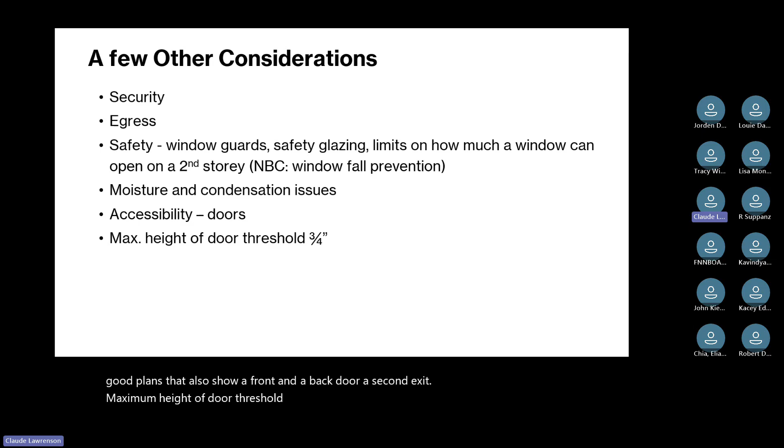So I've seen some plans that show just one door, and that's minimum standard. And I've seen some good plans that also show a front and a back door, a second exit. Maximum height of door threshold should be no more than 3/4 of an inch. So again, because we think about accessibility, people in, say, wheelchairs.

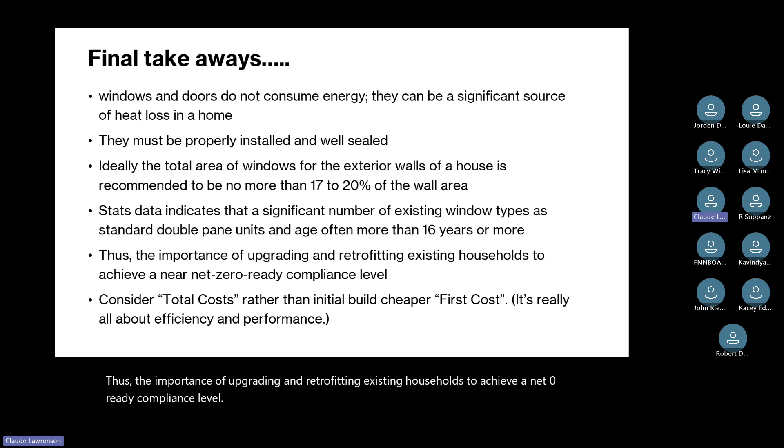Thus, the importance of upgrading and retrofitting existing households to achieve a net zero ready compliance level. Consider total costs rather than the initial cheaper first costs. It's really about efficiency and performance.